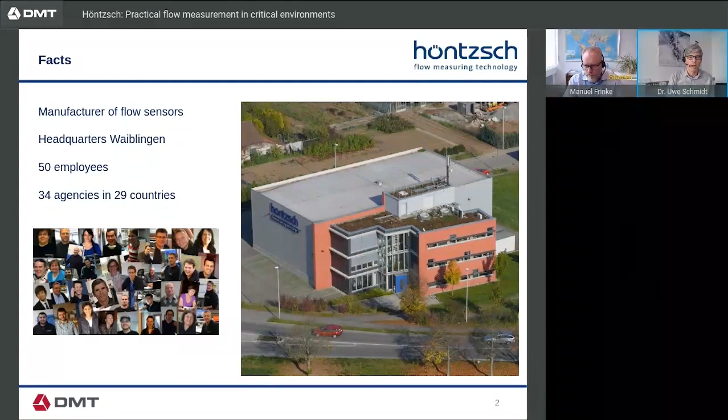We are 50 people at Höntzsch. We develop, design, and manufacture flow sensors, and obviously we sell them. We sell them all around the world, basically. This is by using a lot of agencies. Some of you take part today in this webinar.

When I started at Höntzsch some more than 3 years ago, I was introduced into the wide range of flow sensors, and this graph shows the large variety of different flow sensors. We focus here on 4 different physical working principles. This is first of all the vane wheel sensors that can be used in gases and in liquids. We have then the vortex sensors. I will come to that a lot of times in the following presentation. This is our problem solver for very demanding applications.

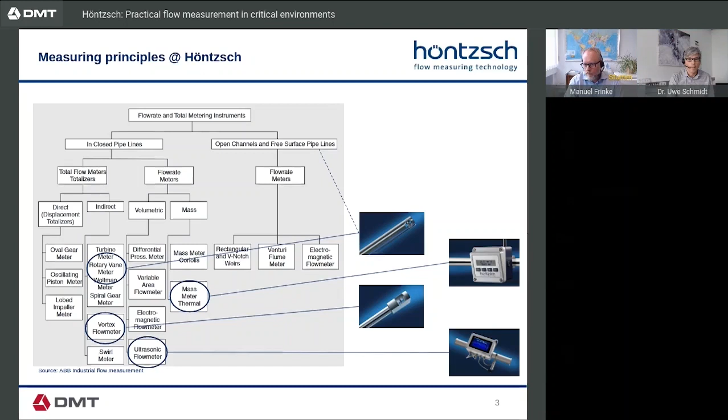We have the mass flow meter, the thermal flow meter, and we have quite lately developed the ultrasonic flow meter, for example for combustion air stands. Now, why is Höntzsch on the market? Why can we survive with all these different flow sensors and so many different competitors on the market?

This is because we have focused in the last more than 50 years on extreme applications with extreme demands. For example, if you want to measure hot air or hot gases up to 550 degrees, then we have very few competitors. If you, the end customer, want to measure gases that hold a lot of dust, up to 900 grams per cubic meter, then we can measure those gases, and not so many competitors are around there any longer. The same applies for varying gas compositions, or if you have a mobile measurement in explosive areas. So we have thereby been successful by looking at very specific applications.

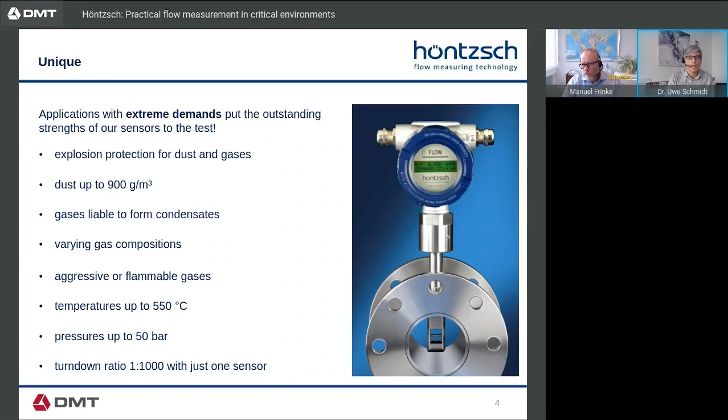So when I started here, I tried to understand this, and I have started to collect the typical applications and the successful applications. First of all, this was done in PowerPoint with some slides. And now over the last 9 months or so, we have started to upload those applications on the internet. I will now introduce you into some of those applications.

What you see here is an operator welding, and you see that he is very heavily protected, obviously for his eyes, for the sparks coming from the process, but also from the dust that is created by the welding process. And nowadays, in modern workspaces, the exhausts, the dust coming from the welding process are directly collected by these vacuum suction systems. They are collected from maybe several workspaces, and the airstream is then measured in order to control this exhaust process.

Now you can imagine, if you have such a lot of dust and particles in the air, then the sensor, as you see on the right-hand side, is under heavy demand from these particles. Nevertheless, it is still measuring. So this is why we use, for these harsh conditions, the vortex sensor.

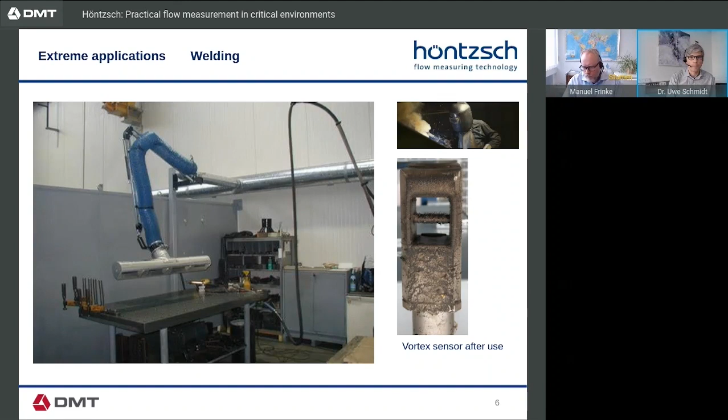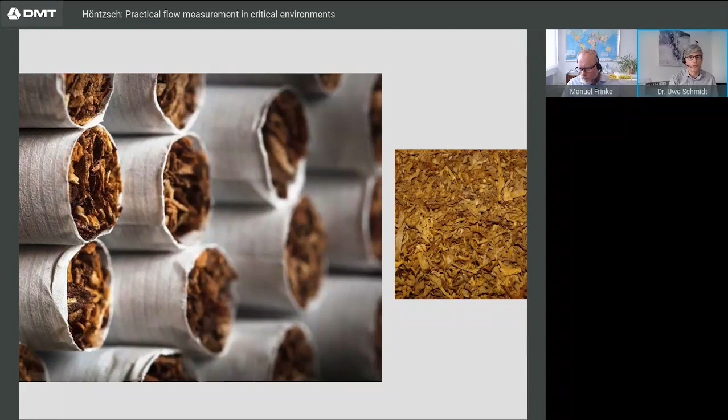Höntzsch and the tobacco industry. That's a long relation. We have served a lot of different companies that produce these tobacco processing machines for drying and for producing the cigarettes. I will now briefly introduce you to one of the first processes after growing the tobacco.

Curing is basically the first process, when the plants come directly from the field. When they come from the field, they are green, as you can see here in the 6 different pictures. So they come green to the curing chambers, and then they start the process of curing these leaves.

Now, what is the indication of the process? Basically, the indication is the color. So the process will be carried out until the leaves receive the right color. That's a light orange. You can see the color here on the right-hand side with particles on our sensor.

So the process is controlled using video cameras to check the color, and the process is also controlled by controlling the flow that goes around, carrying the hot air and guiding it along all the leaves that are stored here. And our part here is to control that airflow using our sensors.

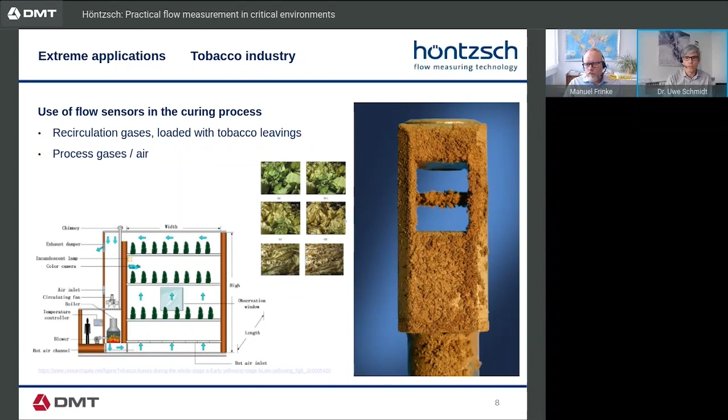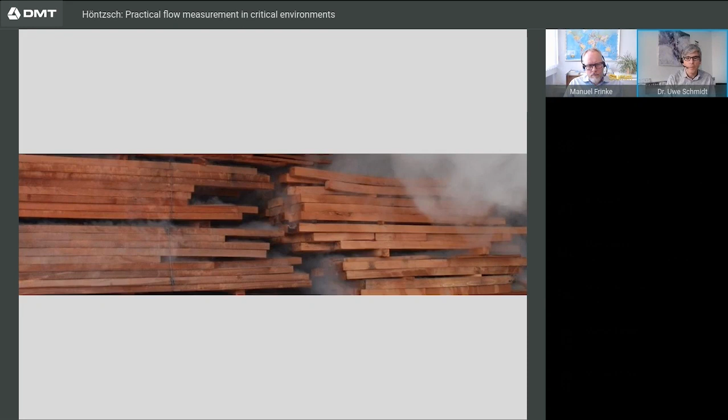Totally different industry, but a similar process. The wood industry. At the moment, we see here, at least in Germany, a high demand for wood, and there's not enough wood around for the carpenter, for example, to work with the material. Now, what I want to show you here is the process of how they basically take out the moisture of the freshly felled wood.

If you fell the wood, then it holds a lot of moisture. That's clear. Now they bring the wood into these chambers. You see the comparison to the tobacco industry, and here as well hot air is used to dry the wood.

Now here it depends on what you want to use the wood for. According to the application of the wood, you are willing to leave a certain amount of moisture in the wood. And the flow here is also controlled by our sensors. So again, it's to control a process of curing, drying, or here taking out the moisture of the material.

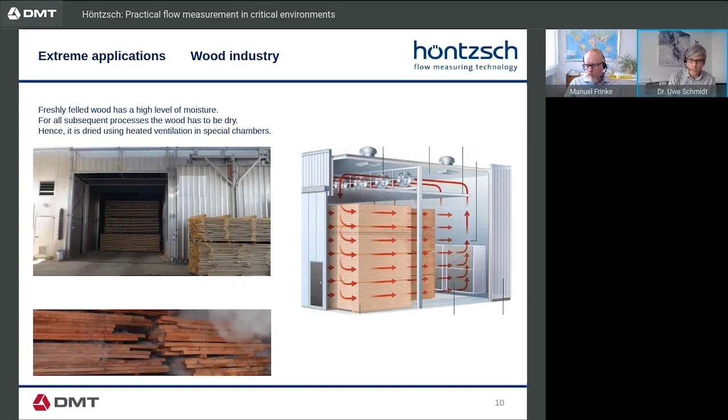Now that could be done with different sensors. The point is that if you have a lot of air that is laden with moisture, then some sensors would not work. And this is why our sensors are quite good to use in those applications.

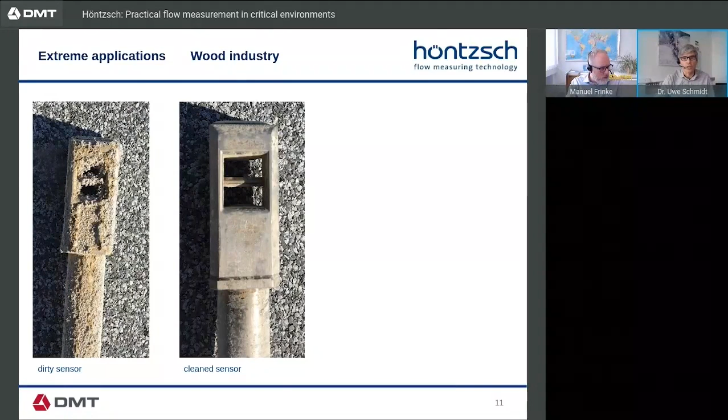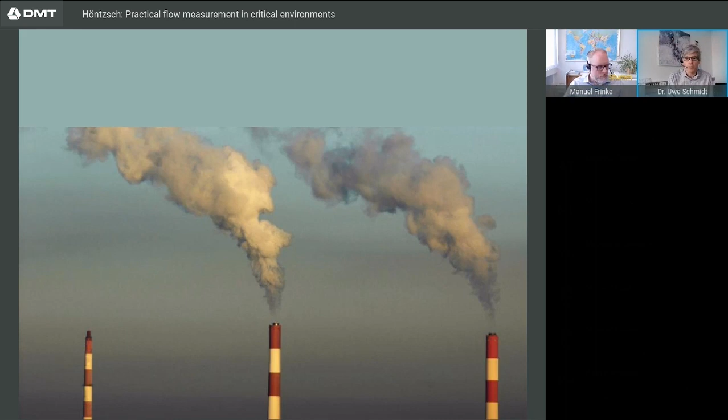We are approaching the next general election here in Germany, and everybody is talking about environmental issues at the moment. Now that the corona crisis is about to be overcome by the nation, the next big theme will be the environmental discussion. And due to the election, it's at the top of the agenda.

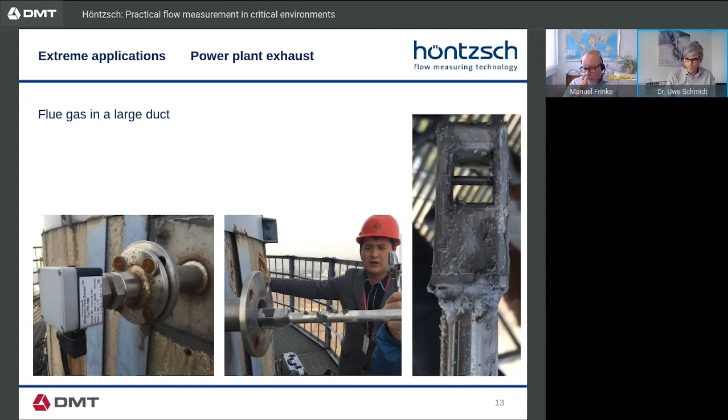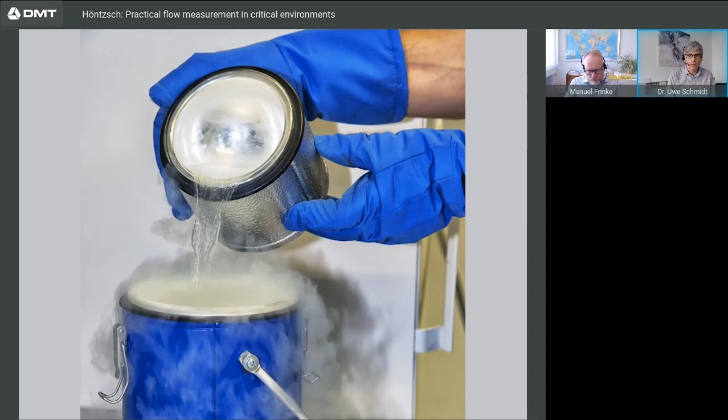Think a minute of what that could be. It is liquid nitrogen, so very, very cold material. And we have a solution to measure the flow of liquid nitrogen at -198 degrees. So why would anybody want to measure this liquid nitrogen?

Because liquid nitrogen is used, for example, for milling processes. If you want to mill rubber, for example, it's just too soft to be milled. You can only cut it. But sometimes you want to form it in a special way, and therefore you have to cool it down. And that can be done using liquid nitrogen. Then the material becomes very hard, and it can easily be processed. So measuring the flow of this liquid nitrogen is a task that we have solved using the vane wheel sensors.

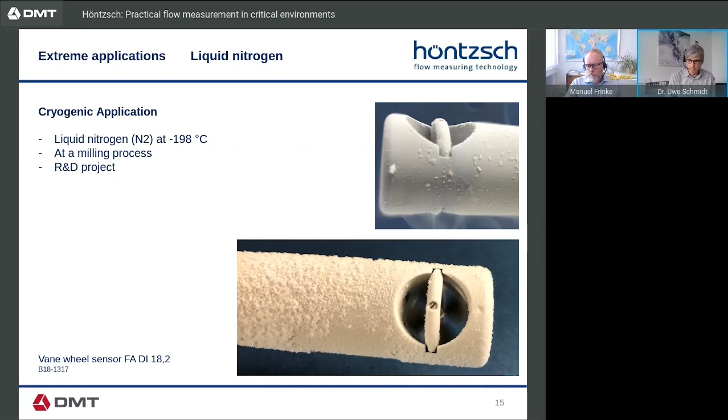Spray process, spray painting of, let's say, furniture, of cars, of all different goods, is nowadays state of the art. It is used to precisely put just enough paint on a product, to put more or less paint on certain areas, to form the spray, to direct the spray according to where you want to spray. And all this can be done using pneumatic spray nozzles.

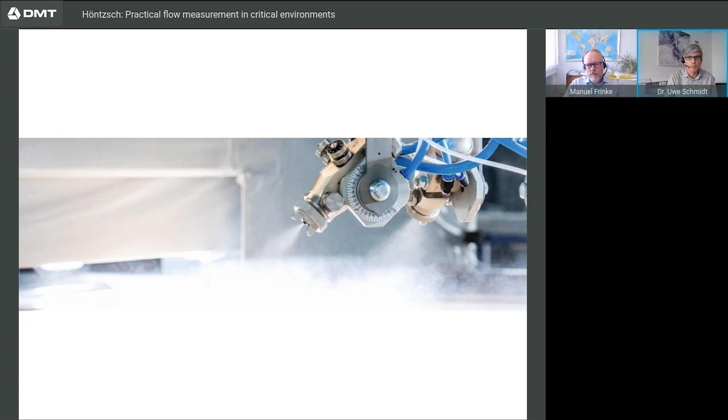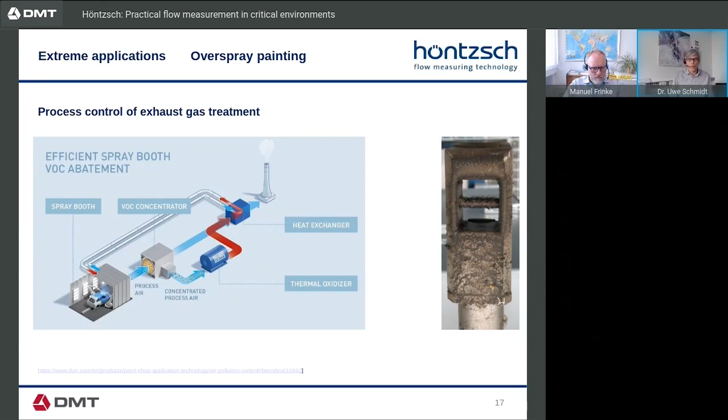So what is a thermal oxidation process? This is one of our top selling processes. Well, we don't sell the process, but we sell the sensors that can be used in such a process. Let me briefly introduce you to the process. Basically, as we have seen, we have the exhaust gas, for example, from a paint booth. That is going here, the heat exchanger. So it's warmed up and it's brought into the combustion chamber.

And what is happening in the combustion chamber? There you have a flame that is fed by the natural gas and air. So we have a flame here heating the chamber up to, let's say, 800 or 1000 degrees Celsius. And therefore, the exhaust gas coming in is basically oxidized. And as a result, we get only CO2 gases and some water. That's the result of this process here in the combustion chamber. And therefore, we can leave the cleaned air out in the open. On the way back, it heats up the incoming air in the heat exchanger.

Now, where does Höntzsch come in? For example, we can control the airflow or the gas flow into the flame, or for the flame of the natural gas. We can control the airflow that is required to produce the correct heat here. So by using just enough air or the oxygen in the air, we can control the flame inside the combustion chamber. And sometimes customers require that to be a SIL2 application or sensor.

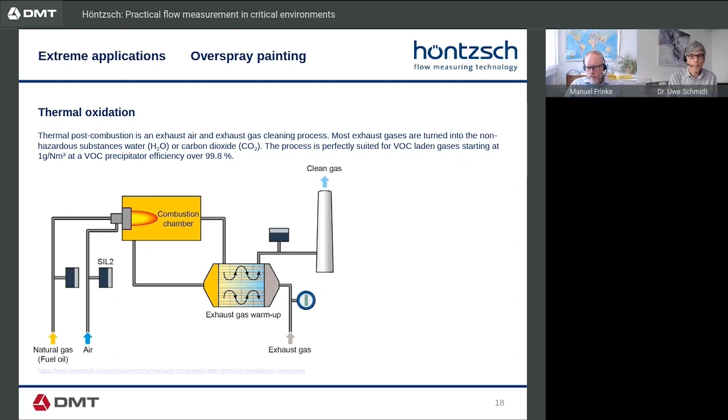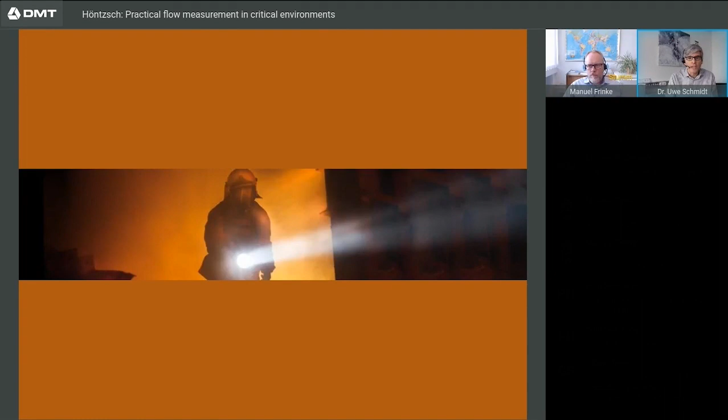Because of the gas used here in the engine, there's always the possibility of leakage in the tank or from the pipes coming from the tank to the engine, and also in the engine and in the exhausts. Therefore, the rooms where the engine and the tank are placed have to be controlled. First of all, they have to be ventilated. So the requirement is to ventilate those rooms 30 times an hour. So there has to be a large amount of airflow taking place. And if that were not the case, it could create an environmental situation, and we wouldn't like to have that. That is symbolized here.

So that was in 2019 a brand new market for us and a very successful market. And we are looking forward to people going on board the cruise ships, and the airflow downstairs, so to say, in the engine rooms will be controlled using our sensors.

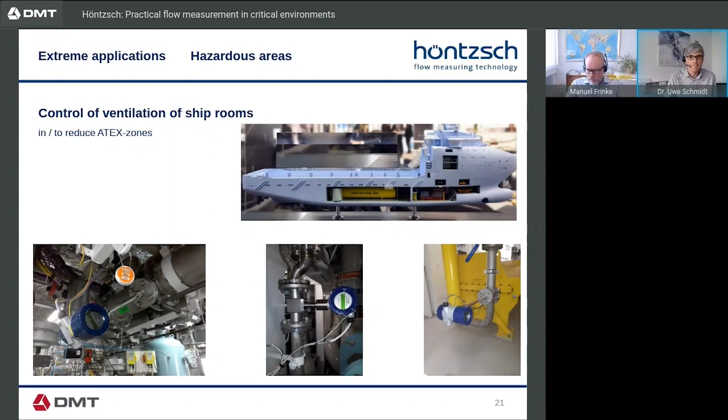The same forced ventilation applies for battery rooms or in environments where batteries are produced. Also a very modern market because of more electricity coming on cars, on trucks and so on. Therefore we obviously need more batteries, and batteries are produced all around the world, and this is why these production facilities have to be ventilated, that's for sure. And we can be part of that game when we sell our sensors into these industries, into these applications.

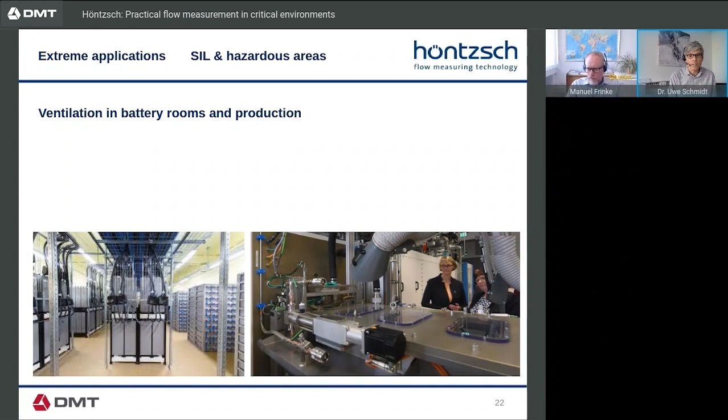In such applications, we see a lot of times that they have to be according to ATEX, sometimes even zone 0, sometimes zone 1. And linked to that, a lot of times it is required to have SIL certified sensors in use. And that is what can be done using the vortex sensor with a certain design, especially designed for ATEX environments.

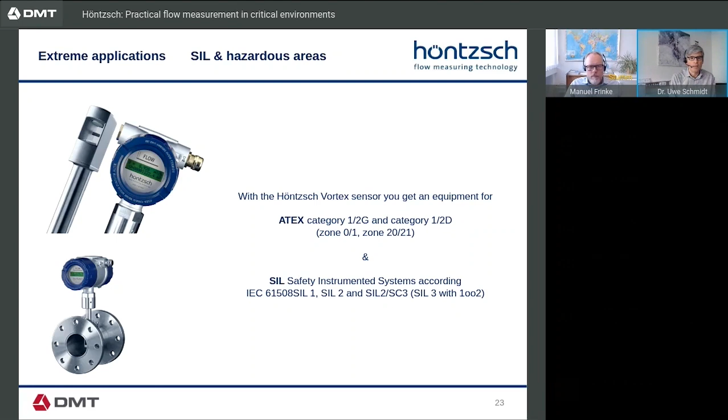So this was the information from my side.